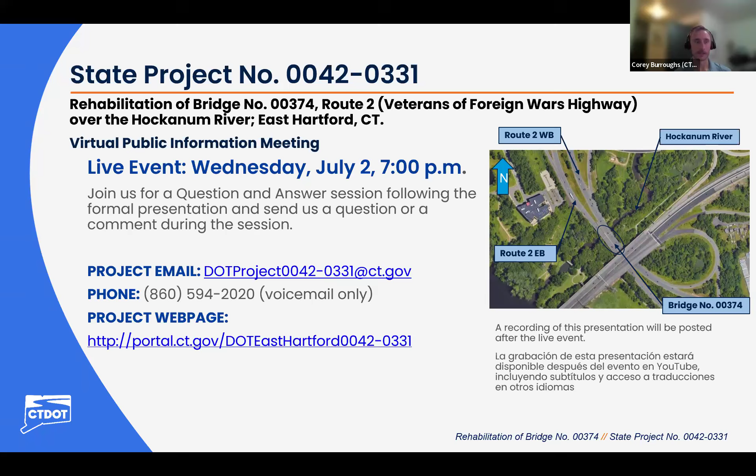Before we get started with the main presentation, I want to walk you through the goals and format for tonight's meeting. First, I'll introduce the project team, including the CTDOT leadership, the consultant liaison engineering team, and the design team, and explain how to interact with us during the meeting. CHA will present the existing conditions, purpose and need for the project, and then hand it off to Banesh's team to present the technical portion of the presentation, which includes the design work that has progressed to about a 30% level.

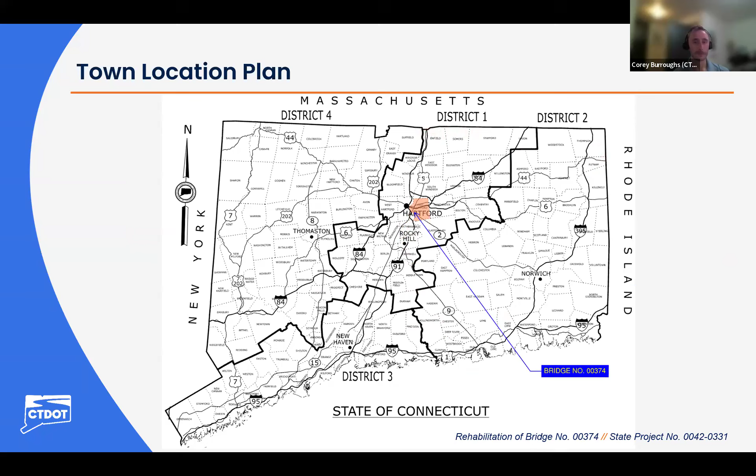This is a CTDOT district map of the state, highlighting the location of East Hartford and its district. Note that East Hartford is located in District 1. Here you'll see the location of the project site relative to Route 5/15 and the Charter Oak Bridge, which crosses the Connecticut River.

I will now hand over the presentation to Karl Stanek to discuss the existing conditions and purpose and need for this project. Take it away, Karl.

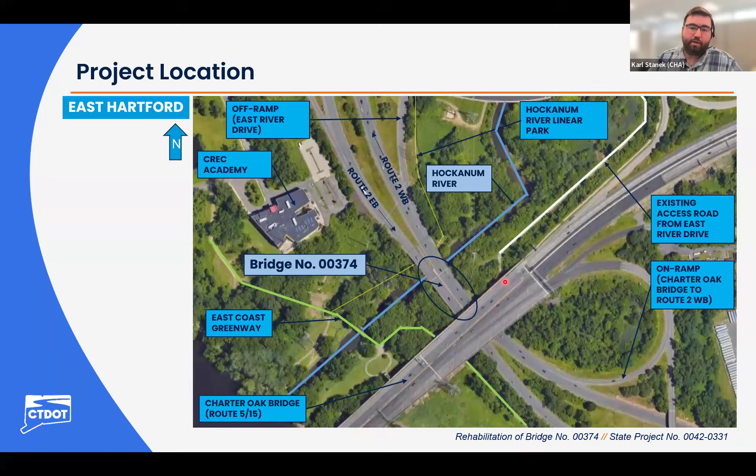The Hockanum River flows north to south underneath span 2 of the bridge and eventually empties into the Connecticut River. There is also an existing access road from East River Drive that comes across and underneath the Charter Oak Bridge.

As mentioned earlier, the Hockanum River Linear Park runs parallel to the off-ramp and to the bridge, coming underneath span 1 and eventually leading into the East Coast Greenway.

Here are a couple of photos. These two photos look south, and this photo looks east, underneath the bridge at span 1. You can see by the little map that it joins up with the East Coast Greenway, goes underneath the bridge, eventually comes over to Route 5, and heads further east to Manchester and eventually to Vernon.

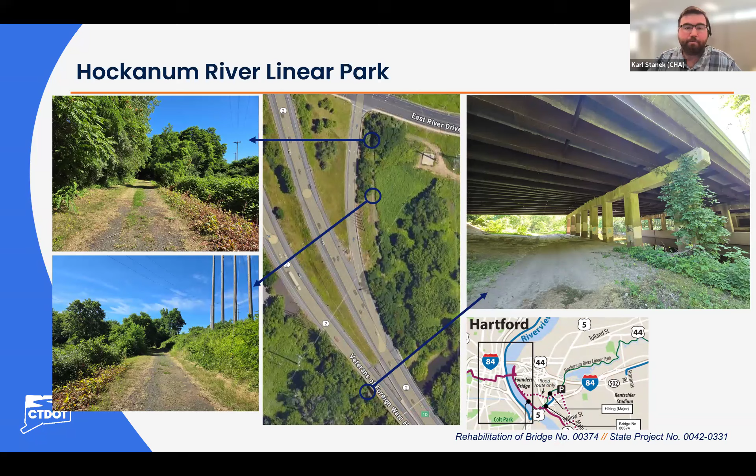Now we'll talk about the existing bridge itself. The bridge was constructed in 1962, rehabilitated in 1989 and again in 1996, when the superstructure was replaced, and even recently in 2023 with above-deck work only as part of the Route 2 corridor project.

The bridge has 5 total spans with varying span lengths, but a total bridge length of approximately 443 feet. The width also varies, with the widest point at Abutment 1 at approximately 142 feet, and the narrowest point around Pier 3 and Span 3 at just over 100 feet wide.

The superstructure is a reinforced concrete deck over weathering steel plate girders. The number of girders varies by span as the bridge width varies, with the most girders in Span 1 at 18, and Spans 3 through 5 at about 15 girders each. Spans 1 and 2 are continuous via bolted splices, and Spans 3 through 5 are also continuous.

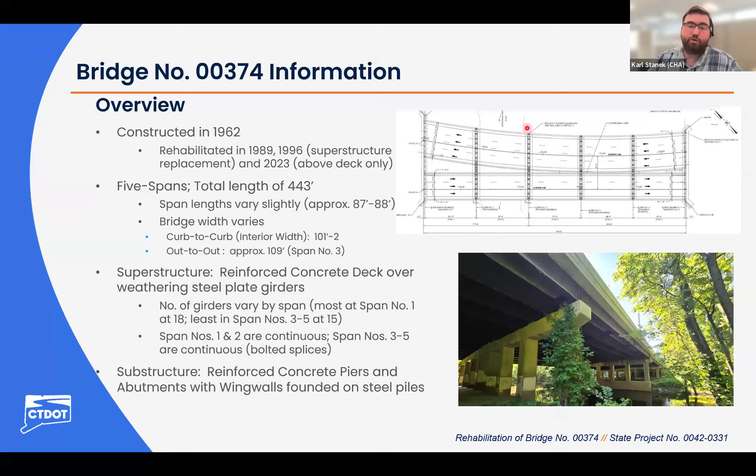The project purpose and need is to address deficiencies identified in the latest bridge inspection report, to improve the structure condition, extend the service life, and provide safe travel for all facility users. The project needs include improving the National Bridge Inventory, or NBI, condition rating to fair or better for all major components, and providing at least 20 years of service life for the existing bridge.

We also need to repair or strengthen existing steel girders as required, maintain bridge deck joints and preserve bridge elements beneath them, protect steel girders along the open longitudinal joint shown earlier and at select girder ends, ensure all bearings are functional and in a state of good repair, and restore abutments, piers, and wing walls to a state of good repair.

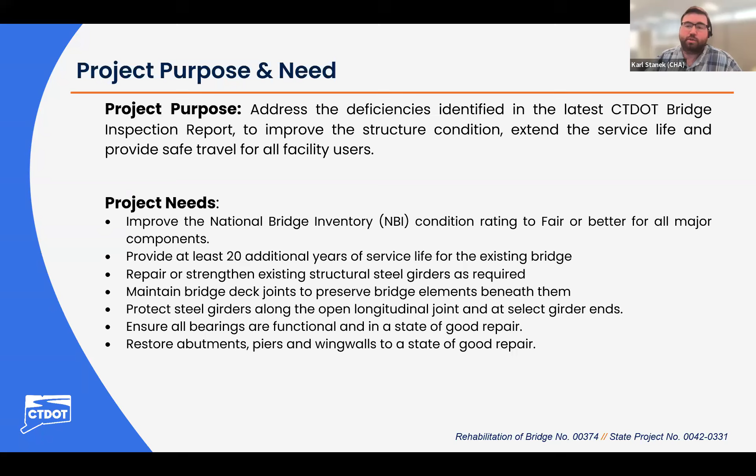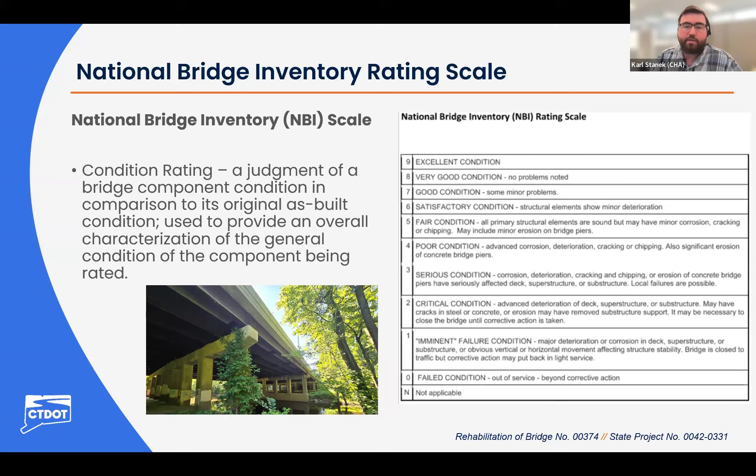As mentioned, we'll talk about the National Bridge Inventory Rating Scale, or NBI scale. Every 2 years, each bridge on a state roadway is inspected, and every component, whether part of the superstructure, the girders that carry the bridge, the deck, or the piers and abutments, is given a rating from 0 to 9 during every inspection cycle. Just because a component is rated in poor condition doesn't necessarily mean drastic concerns, but it does mean Connecticut DOT is looking at it and assessing proper rehabilitation.

So here we'll talk about the existing field conditions, in particular the superstructure. And again, we see some of the ratings here. So the girders do rate to be in poor condition.

There's some heavy laminated rust, especially at the girders alongside that longitudinal joint, which is slightly open. You can see some of the gapping right here, and that allows for infiltration of water and debris to collect, and to impact the steel girders, causing some of that laminated rusting. You could see here on a girder end and along the bearing as well, and some other spots along several other girders.

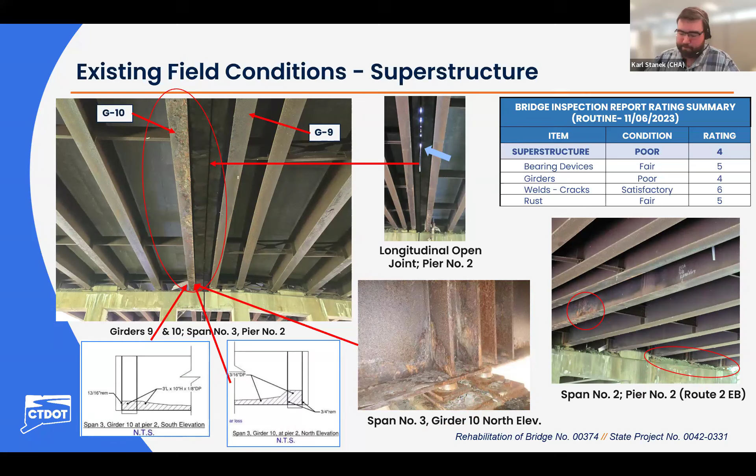Here we have the existing conditions of the substructure in general. For the most part, the substructure is in satisfactory condition with some fair ratings, particularly on the caps. Overall, most of the various substructure units are in satisfactory condition. So we show the abutments, the 2 abutments, piers 1, 3, and 4, which overall are in good condition.

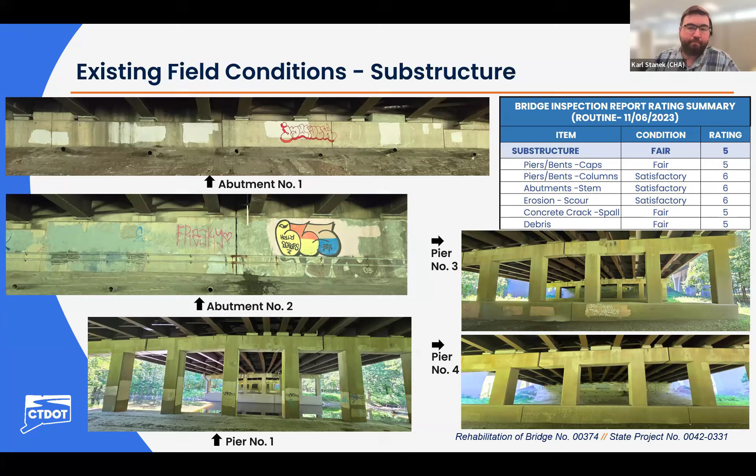So really, for the substructure, what might be bringing it to more of a fair rating would be pier 2. And again, I had mentioned earlier about the open joint being at this pier as well. As you can see from the various pictures here, the deterioration shows some spalling of the concrete, or chipping away, exposing some of the rebar elements there.

You can see some cracking, some efflorescence showing, particularly because of the leakage coming through, quite a bit of debris on the pier cap itself. And even at the end of the pier here, you see quite a bit of deterioration. So this would be the pier affected the most.

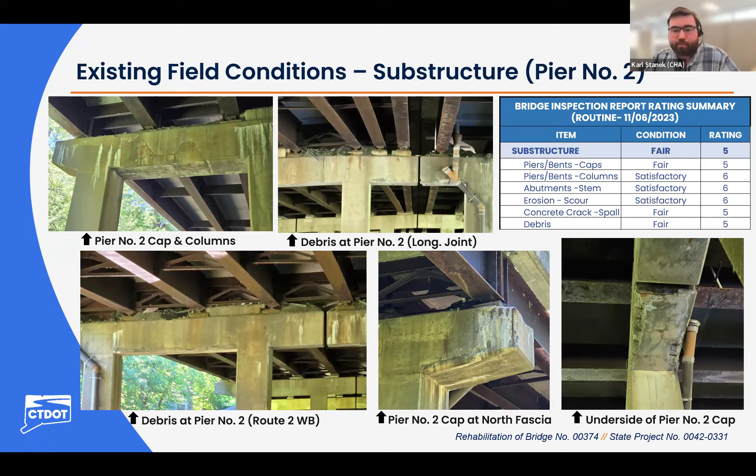And with that, I will introduce Mark Habek from Alfred Benesch and Company to discuss the proposed scope of work for this bridge rehabilitation. Go ahead, Mark.

Thanks, Karl. All right, so now we're going to talk about the proposed project scope for the job, which is to rehabilitate the existing bridge superstructure and substructure, primarily through performing routine maintenance tasks. The project includes localized steel repairs and strengthening to the bridge superstructure.

It also includes cleaning and metallizing the girders at that open longitudinal joint between eastbound and westbound that Karl mentioned, cleaning and metallizing the beam ends at pier number 2, which has a joint above it, and replacing all bearings at pier number 2, as well as select bearings that are deteriorated throughout the structure.

Removing and reconstructing pier number 2 cap. It's a concrete pier cap that will be reconstructed. And as far as the other substructures, abutments and piers, those will be repaired as necessary through concrete patching.

The deck joints on the bridge located at the abutments and pier number 2 will be replaced. At pier number 1, the stone revetment will be repaired for a small area under pier number 1. And the construction of access roads to facilitate these repairs will be required for this project.

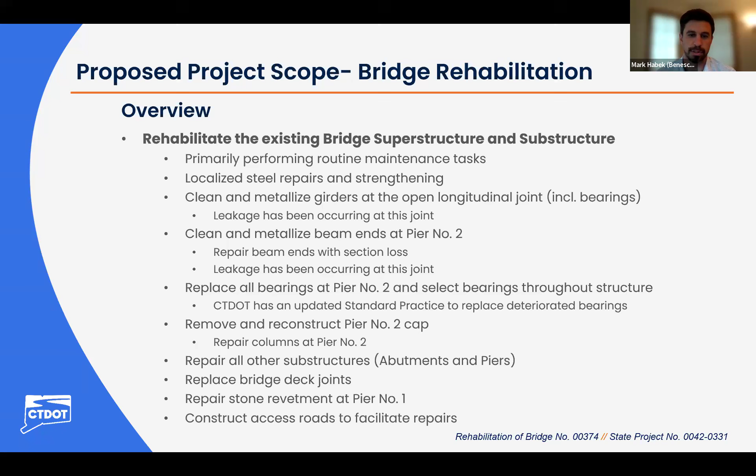So now we'll be going through a few of the preliminary design plans and highlighting each of those scope items just discussed. Starting with this bridge plan, looking down at the bridge, this is really focusing on the work that will be done up above at the roadway level. That includes replacing of the joints. As you can see highlighted in yellow here, those joints are located at both abutments as well as at pier number 2.

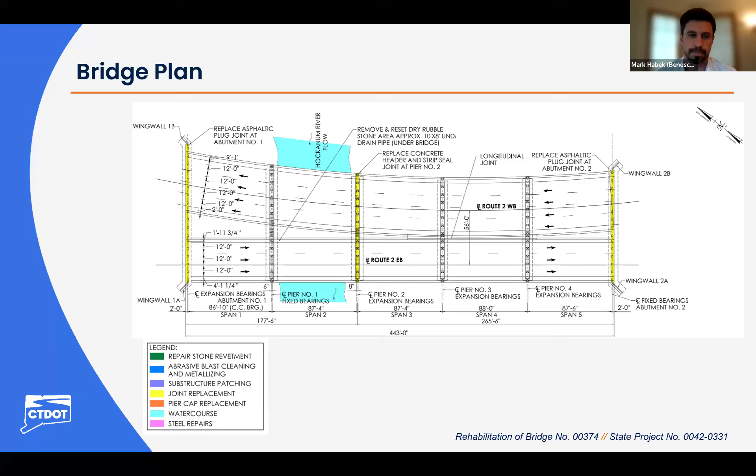Moving on to the bridge elevation, this scope of work here, you can see the substructures highlighted in purple. Those substructures will be patched as needed to repair any deteriorations to the piers and abutments. You can see at the base of pier number 1, highlighted in green, there will be repair to the stone revetment there. It's approximately a 10-foot by 8-foot area that requires repair.

Moving on to pier number 2, you can see at the top of that pier, highlighted in orange, is the pier cap. That existing concrete pier cap will be removed and reconstructed. And you can see some of the steel highlighted in pink and blue. Those are some steel repairs, abrasive blast cleaning and metallizing that will be shown on the upcoming slides.

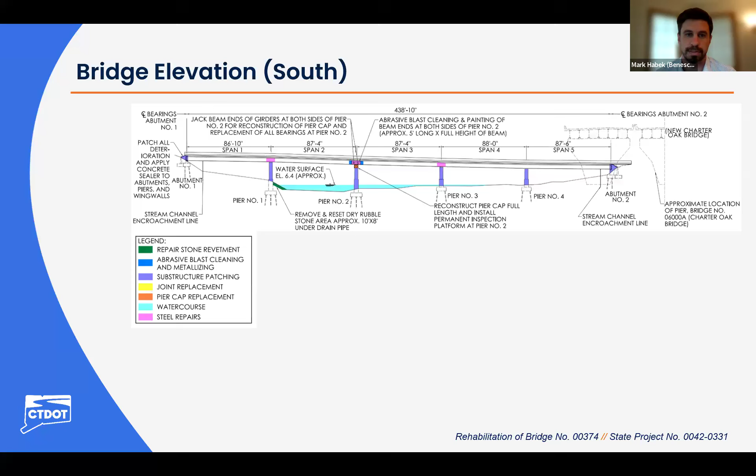Here we have the existing bridge cross section. You can see all of the existing bridge superstructure shown in that peach color here. What we're really highlighting is girders 9 and 10 in this image, boxed in blue. These are the 2 girders that are on either side of that longitudinal joint. These girders will be abrasive blast cleaned and metallized to protect them from any leakage through that longitudinal joint.

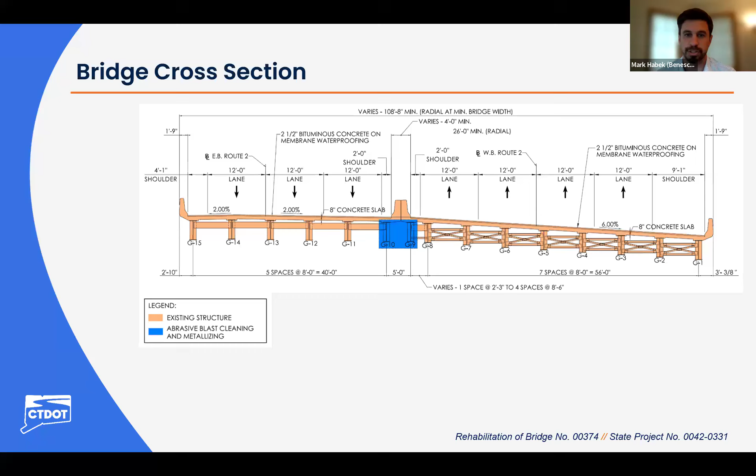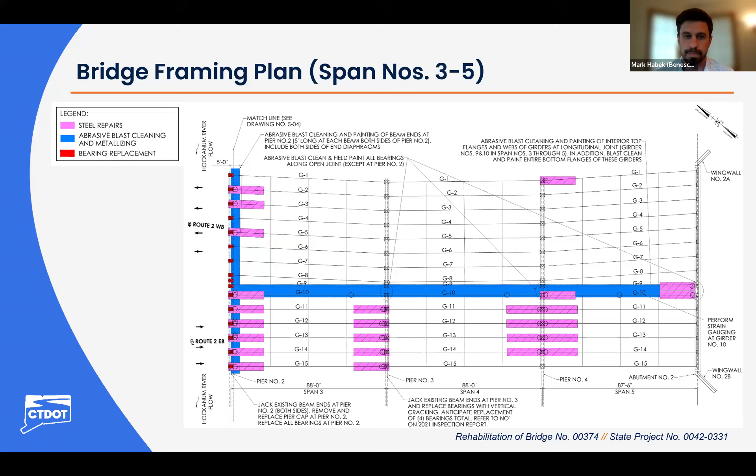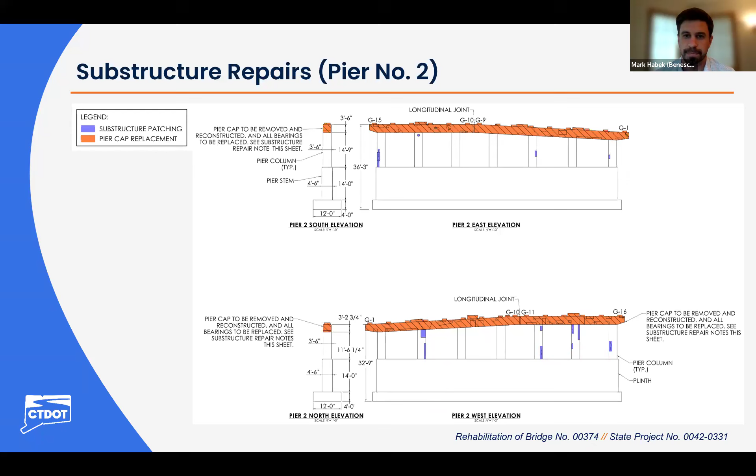Maintenance and protection of traffic and construction access during the project, including on Route 2, will be needed to replace those joints at the abutments and Pier 2. We're proposing off-peak temporary lane closures for that work.

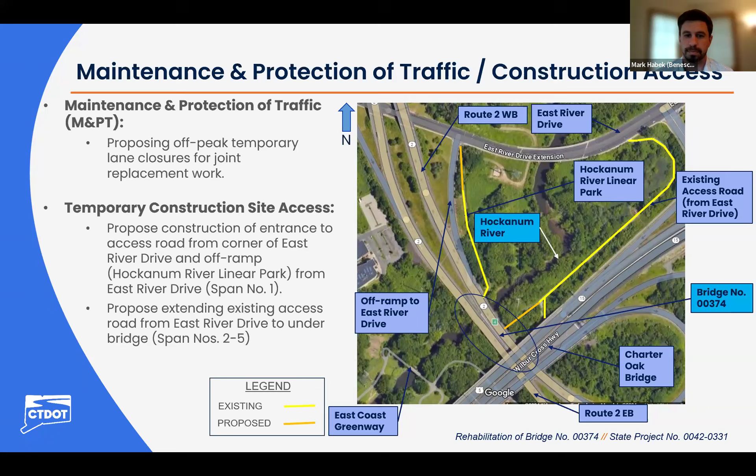Anticipated project impacts: looking at the Hockanum River Linear Park, we anticipate a temporary closure within construction limits during the project. As far as the Hockanum River itself, there are minimal impacts anticipated for stone revetment work at Pier number 1. No impacts are anticipated for utilities or rights of way.

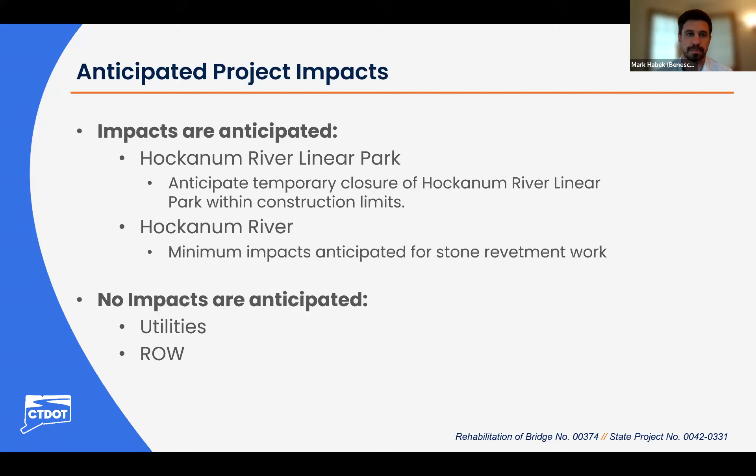Thanks, Mark. For the schedule, we're currently in the preliminary design phase and will be moving to final design later this summer. We anticipate construction will begin in summer 2028 with work complete by fall of 2029. The anticipated construction cost is about $17.4 million, funded with 80% federal and 20% state funds, with no town funds utilized. Please note the project schedule and costs are preliminary and subject to change as the design progresses.